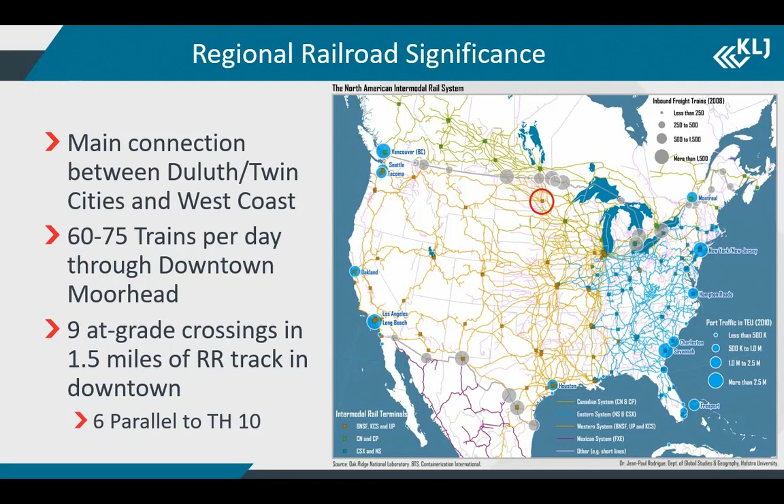So a little bit of background on the BUILD discretionary grant application process. The US DOT puts out this application process to try to find projects that have a significant impact on a local or regional location. They're usually in the 15 to 20 million range. You're trying to get those big projects where a city or a county couldn't pull together funds to fund this on their own.

There's a total of about 900 million available for these BUILD grants, about 25 million per project or less. That's kind of the upper bound, and then only 90 million can be awarded to single states. So they do try and spread this around the country. The last couple of years, they've been making a big push to get about 50% to rural areas for rural projects, which means under 200,000 population. The Fargo-Moorhead area is at 233, so unfortunately, we didn't meet that category to get into a rural application.

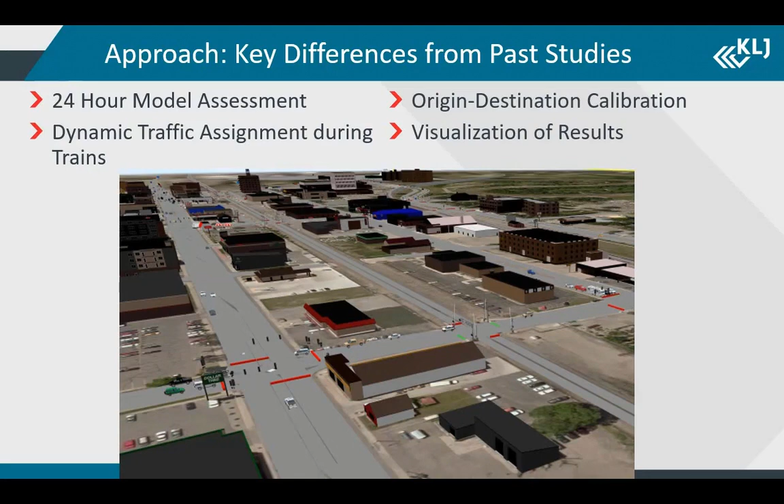So we had some of our graphic designers put together a 3D model of all the buildings in Moorhead, which we were able to take to stakeholder meetings and really show these different options of the project.

So our study approach, we had a very robust data collection. We did the origin destination assessment using StreetLight data. We developed a VISSIM model and calibrated it. Traffic projections development took some time.

With the Moorhead downtown area, it's pretty well built out right now. It's an older downtown, so there is some redevelopment happening, but we're not seeing major growth. However, we have seen major train growth, especially back during the Bakken oil boom. There were probably close to 120 trains going through Moorhead at that point.

We also wanted to look at some alternative analysis when we did put in the grade separation. Could we do some road diets to some of the 5-lane sections going through Moorhead? And then finally, we developed a benefit cost analysis for the BUILD grant.

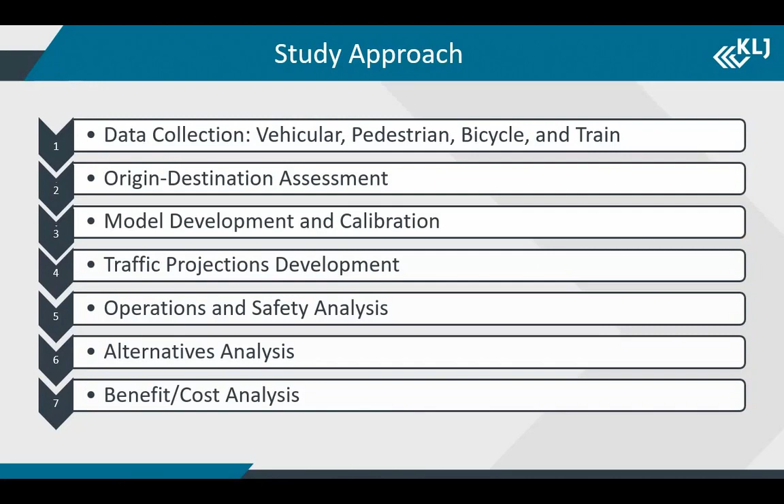So our data collection did include about 20 turning movement counts. We had 8 daily counts kind of around the downtown area. You can see the 3 major east-west routes. And then we did take train data collection points as well, looking at the time of blockage, how many trains, when they came during the day, so that we could put this level of detail into our VISSIM models.

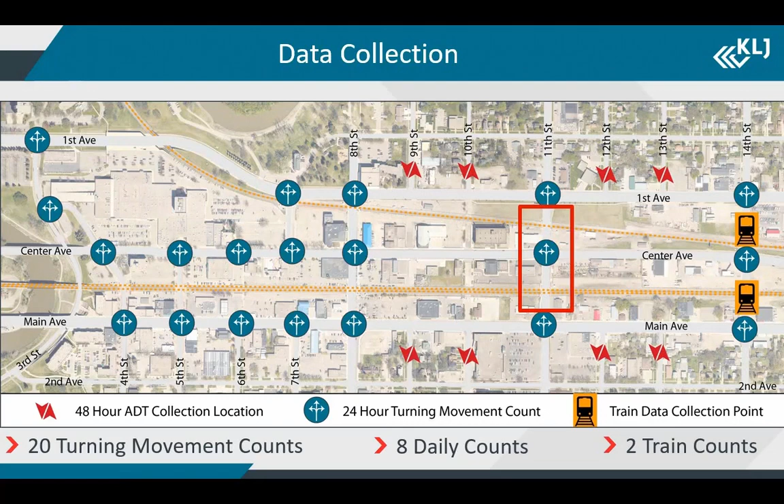So looking at some of that train data over the years, since Moorhead had developed BUILD grants, I believe 3 previous times, they have a lot of this train data year after year of how bad the problem is in Moorhead. And really we saw between 60 to 70 trains per day on average, looking at this yearly data. There are 2 tracks, the KO, which is the northernmost track, and then the Prosper, which is the southernmost track. And they are kind of unbalanced as far as train volumes using them.

Sometimes the trains came when the other one was going, so you kind of double down on some of those queues. The worst case scenario is a 5-minute train one way, with one coming the other way directly after it, which would cause major queues on Trunk Highway.

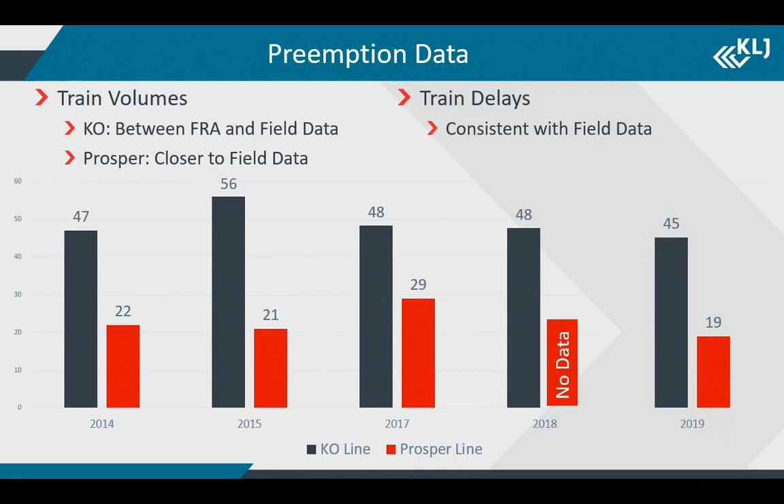What are the speeds of the train going through? Is it fast or slower? Since it's going through a downtown area, I believe it's around 15 to 20 miles an hour for the trains going through. So it's about a 5 to 7 minute train going through here. And they're long trains too, I believe. We had about a mile in the model. So big trains and very slow.

When we looked at how long that train was crossing, our average was between 3 to 5 minutes for blocking a specific crossing. When you add in the gate time, the arm coming down, it was usually 5 to 7 minutes. The previous model was a little bit higher, and then they do have some switching maneuvers where the trains end up blocking a certain crossing for up to, I believe, 10 minutes. So those happen maybe 3 to 5 times a day, usually outside of those peak hours.

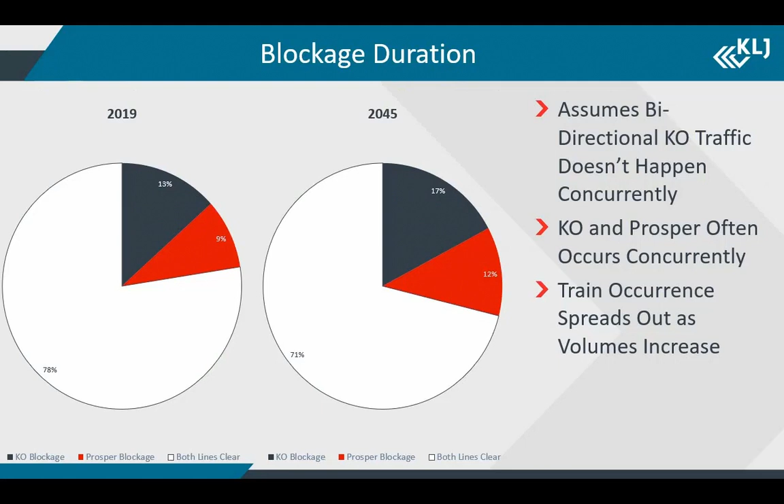So I talked about StreetLight data, being able to take that turning movement data and really assign where that traffic's going. We didn't want to use static turning movements in our VISSIM model, so we wanted to create that origin destination matrix around our study area. So we were able to use StreetLight data with MnDOT's access to it. So we had real robust OD data.

We ended up doing exterior points, both origins and destinations, and then interior zones to balance out traffic where it was going in downtown. This created about a 50 by 50 origin destination matrix for a 24-hour model. That was a lot of balancing. So we kind of grouped this data.

Streetlight already groups it into kind of an early AM, AM peak, midday, PM peak, and then late PM. We kind of took that and said those origin destination routes are going to be pretty similar during those periods, and instead we're going to take those percentages and then balance out the turning movements throughout those sections. So really we only created the 5 50 by 50 origin destination matrices.

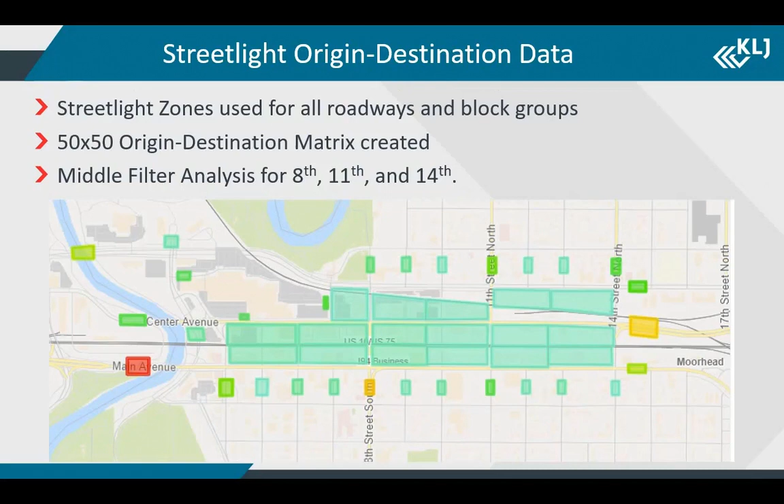And then we also looked at middle filter analysis for the 3 north-south routes connecting all 3 of our east-west routes, 8th Street, 11th Street, and 14th Street. We wanted to really see what traffic was using those, where they were going, and understanding that so that when we did have that 11th Street grade separation, we understood what volumes were shifting from the other routes to use that grade separation.

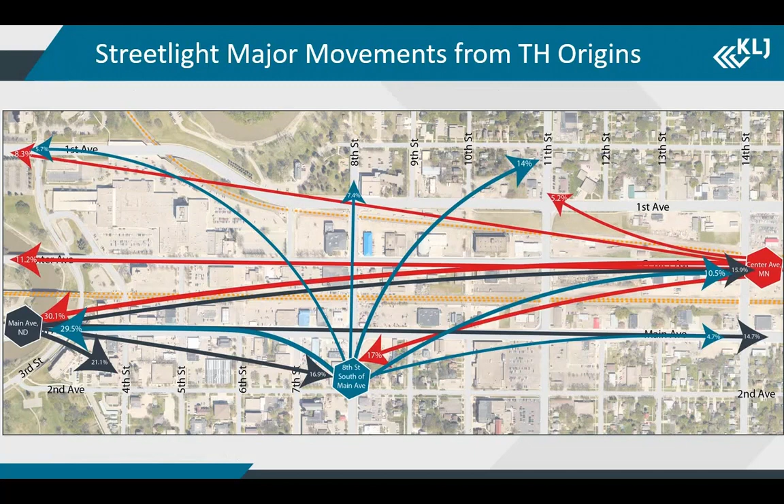And so talking about the matrix, this is a screenshot of one of those 5 peaks. We ended up having all of the origins and destinations summed up. We did a sum of squares in Excel to try and limit that error, comparing back the vehicle inputs of all of the incoming traffic and outgoing traffic that we had from our turning movements, and then balance that through our origin destination from Streetlight to kind of limit out the error.

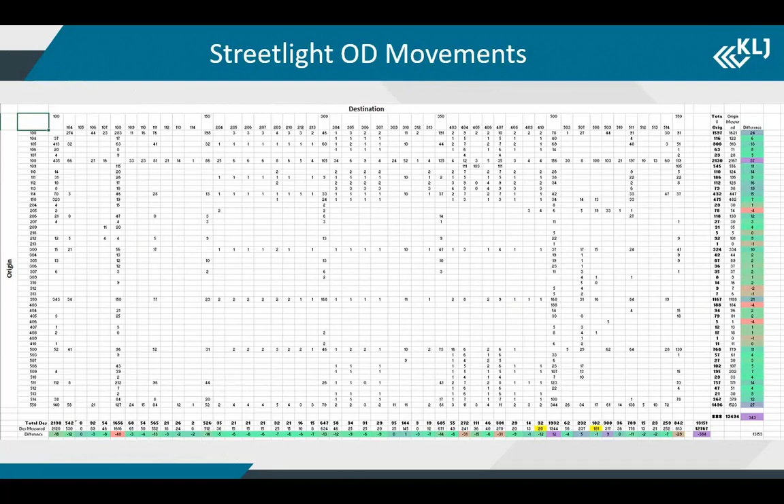And for most locations, we were within probably 300 to 500 vehicles for a five-hour period. So when we balance that back to the turning movements, our movements were off by about 5 to 10 at the most. So we felt that we had a really good balanced set of data going into VISSIM that we could use, and then we did back check this against those turning movements by using some features in VISSIM. So we started out with our turning movement counts.

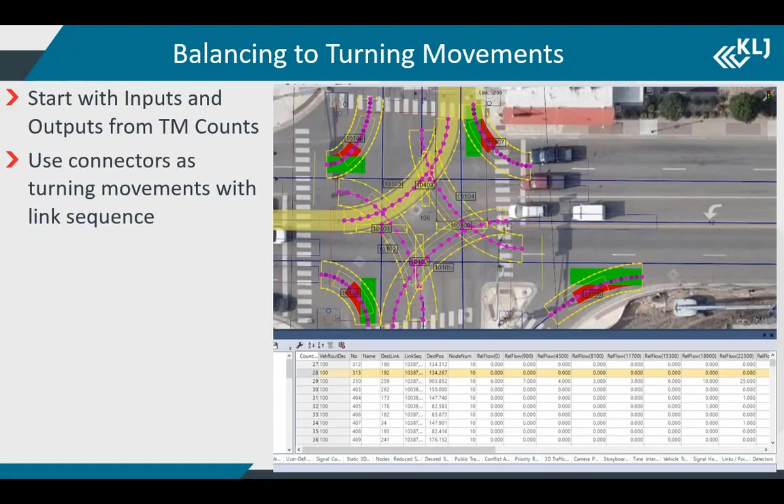We had our northbound, southbound, eastbound, westbound movements for each intersection, for each hour of the day, so 24 hours worth of it. We then took that, and in the VISSIM model, we created connectors for each of those turning movements. So usually you only have your left turn connectors and your right turn connectors. We actually broke the links going through the intersections, so those through movements also had a connector number associated with them. And when we look back, for each of those turning movements, we had a connector number associated with that.

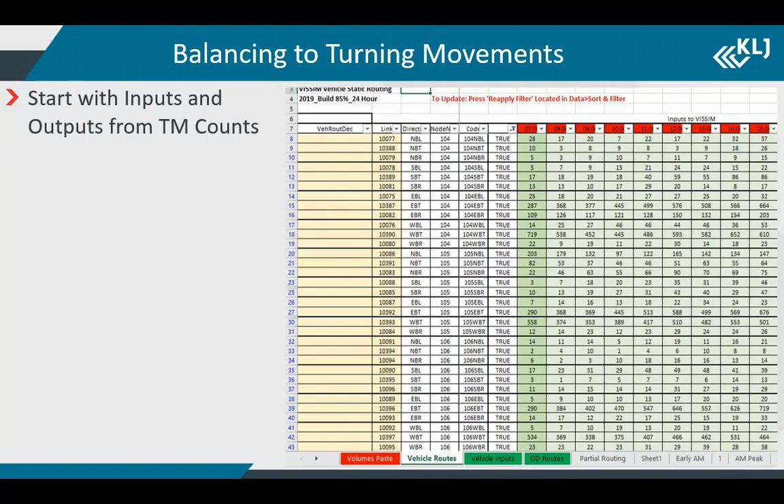So what we were able to do with that then is when we pulled out the routing out of VISSIM, now we had a link sequence for each of those OD routes going through the model. And we were able to do index functions and VLOOKUPs to take our Streetlight data that we had for each hour and then compare that back to the turning movements and then take specific link sequences and change them up to balance out the turning movements. So that was kind of a trick that we learned in VISSIM, was really using those connector numbers to back check to our turning movements.

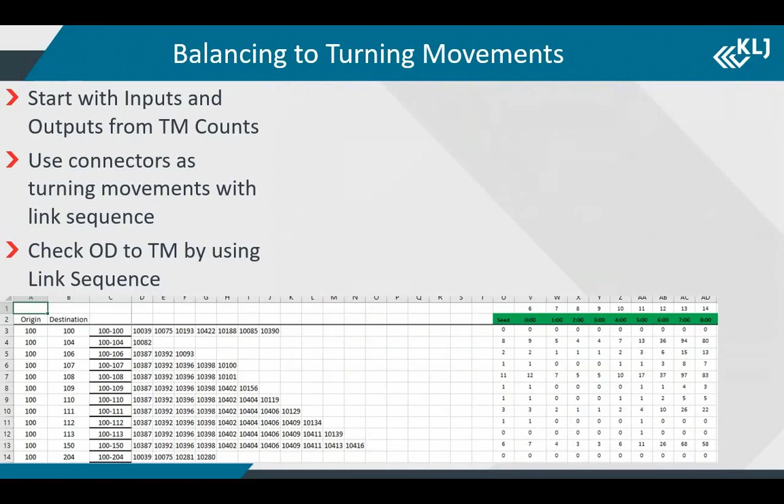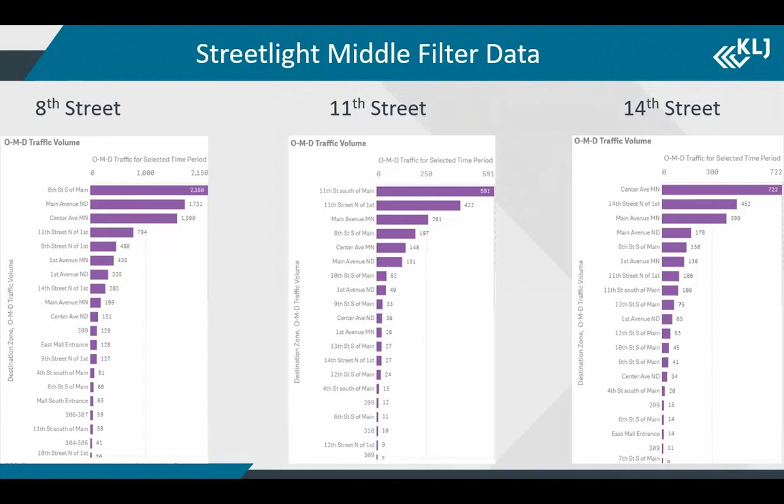Talked a little bit about the growth implications before. We ended up assuming about a 0.5% growth factor for this area. Since downtown was kind of redeveloping, this was kind of a punt for really doing an in-depth forecasting, but we wanted to feel that we had some growth involved in downtown and that we felt comfortable with if we built this grade separation, traffic would still flow through downtown.

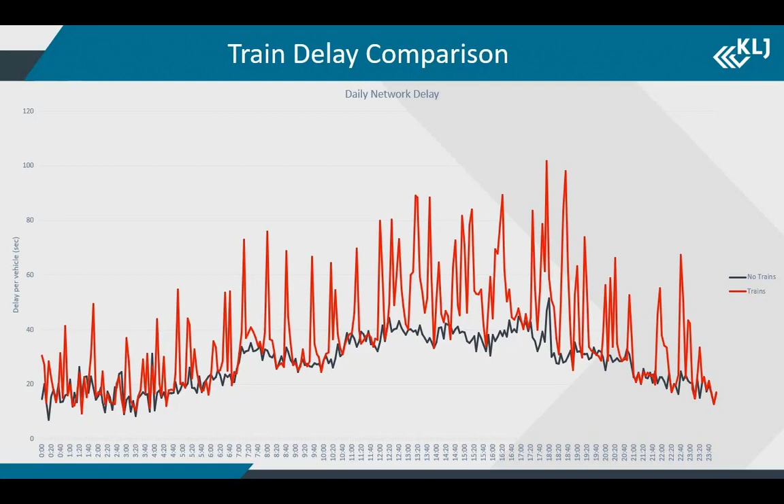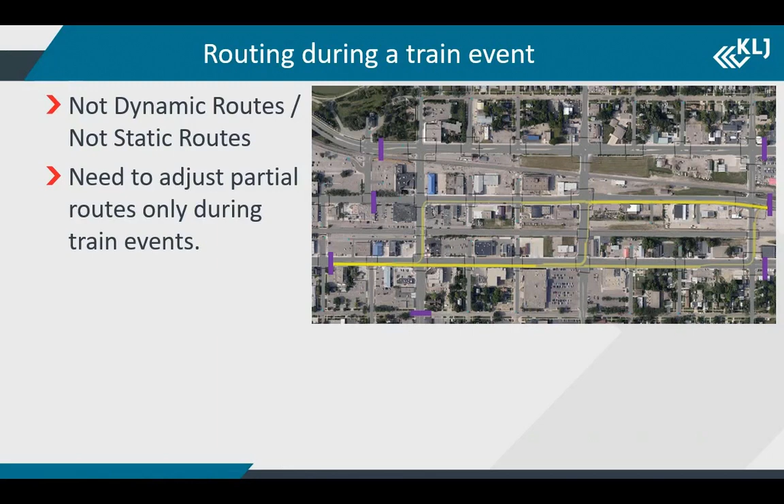I talked a little bit about the routing before. During a train event, we wanted to have this be kind of an ITS feature where we could put up advance warning. When a train hit a detector, drivers would know to use the 11th Street grade separation instead of any of the other at-grade choices at 8th or 14th. And so we wanted to adjust these routes only during train events so that when there weren't train events, people still took their more direct route.

And so we get to call out Levi here. We kind of ran into a problem where I knew I was going to have to do some coding. It ended up being a lot easier than I thought with the route choice method option in the partial vehicle routes. And so Levi helped us with developing a formula where when a train came into the study area, tripped a detector coming into the area, the routing would change dynamically where drivers would know to use the grade separation. And so instead of guessing at what that traffic shift would be to the grade separation, we were actually able to dynamically see what that volume shift was between our no-build and build model by using this dynamic routing during a train event.

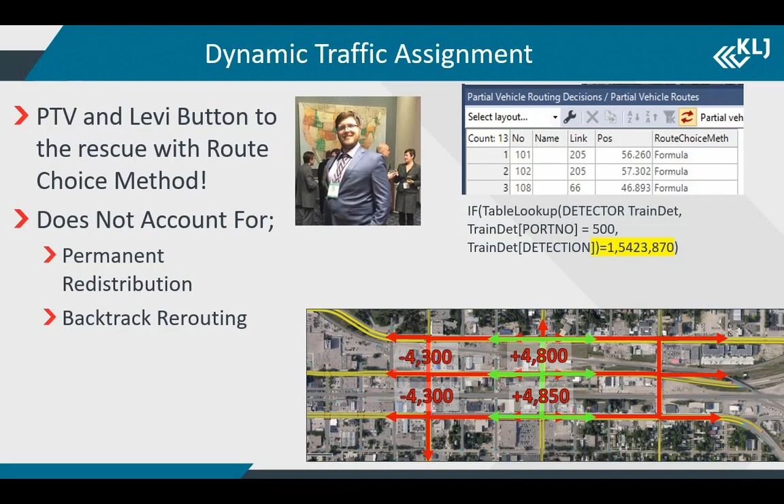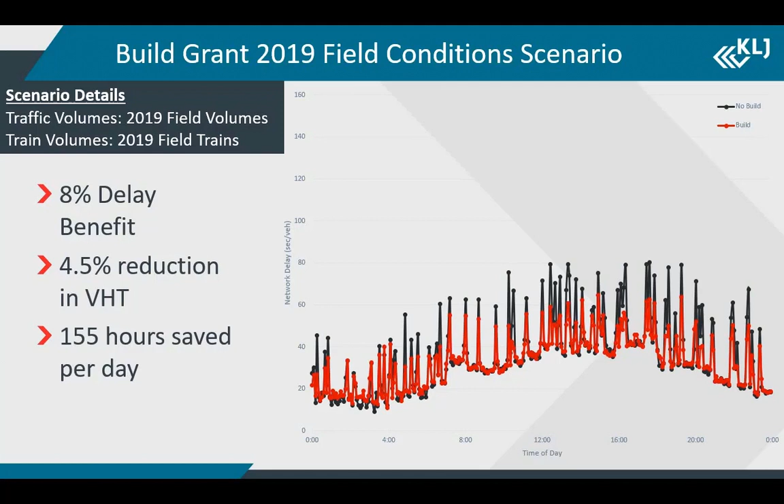So when we started looking at our build grant results for putting in this grade separation, we did notice quite a bit of this delay getting cut by about a third or half of those spikes. And so for our 2019 field conditions, where it was our balanced volumes, our existing train data from 2019 and our existing volumes, we had about an 8% delay benefit throughout the day, and then about a 4.5 reduction in total vehicle hours traveled. This was about 155 hours saved per day of just people not waiting at tracks and queues.

When we started looking at 2045 scenarios, you can see that big increase in that PM midday peak where it's not fully recovering after a train event. A train would go through, you'd still have some of those queues, and then you'd have another train go through and you wouldn't get rid of those queues and they just compound and really start adding to the delay throughout the day. So we had an even better delay benefit, about an 18% delay benefit for our 2045 forecasts. That was about a 1% growth for traffic volumes and a 1% growth for train volumes.

We did a couple other scenarios where we looked at that 0.5% growth for traffic volumes. We looked at a 2% growth for train volumes. And when we went up to about a 2% growth for train volumes, it absolutely broke the model because you'd get to the PM peak and these would just compound to where they couldn't recover at all and would end up causing gridlock in our models. So we really went to our stakeholders and said that there is a limitation to the model. It might work, but really with a 2% growth rate for the trains, we would expect some pretty bad conditions in the future, which our model just can't look at.

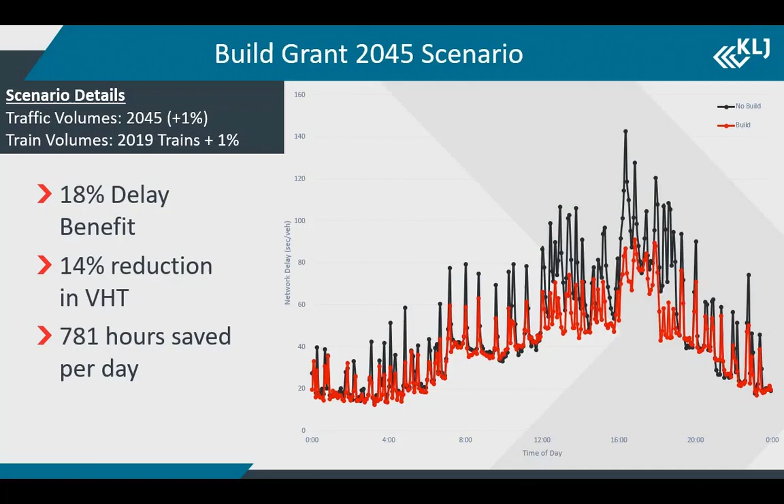So I did talk about that 0.5% growth. So we did some additional model runs after the build grant was submitted with additional trains. We wanted to look at that high mark for trains that had come through. And you can see that the lines get a lot closer together. We used a little bit less for traffic, but we still had a much bigger existing benefit.

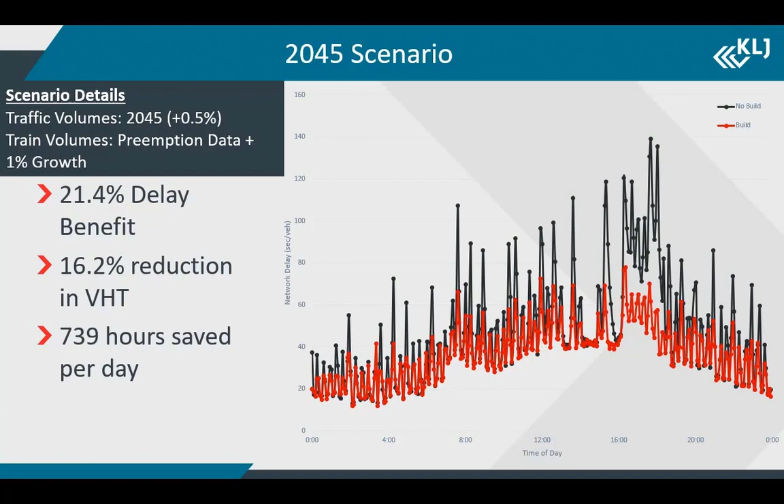So more trains cause more delay. If you give them a grade separation, it's going to be a lot more benefit when we were looking at that. And so we were at about 266 hours saved. And then for that 2045 scenario with just the 0.5% growth, we were in that 700 hours saved per day range. And so when we compared what we had submitted for the build grant and what we had for our sensitivity scenarios, there weren't too many differences other than that existing when you looked at your total VHT saved.

And we had a little bit more benefit, and if we were to go back and submit for the build grant, we probably would have used this because there's a lot more benefit attributed to existing conditions than to future conditions.

And so just a video of our build conditions. You'll see as the train comes into the model here that this left turn queue is going to stop queuing, and all of these vehicles are going to go up to 11th Street now. And so we had some dynamic or adaptive signal timing where our maxes jumped up by about 50% for these major movements, having that additional traffic growth coming in.

And you'll see that there's hardly any queuing along Main Avenue down here. There's still a little bit of queuing on US 75 and to the north, but these left turn movements, these through movements, clear within one cycle. So it's a lot better running model. You're not seeing those really long compounding queues that we were seeing in the no build.

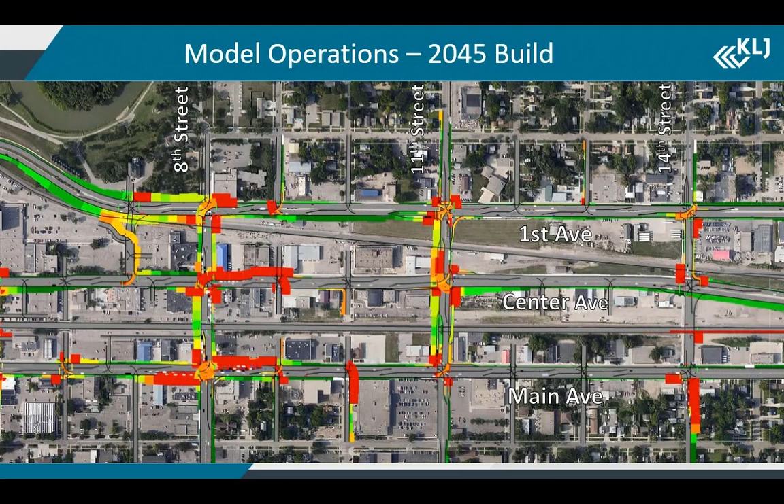Another big factor for our build grant application was quantifying the safety. It wouldn't be a presentation by me if I didn't talk about SSAM a little bit. So we did use SSAM to really quantify the rear end, merge and crossing conflicts on a quantitative level between no build and build. From the pictures, you don't see a lot of change. There's a lot less impact along this left edge where those queues were extending across into Fargo. The build scenario really did fix some of those queuing issues.

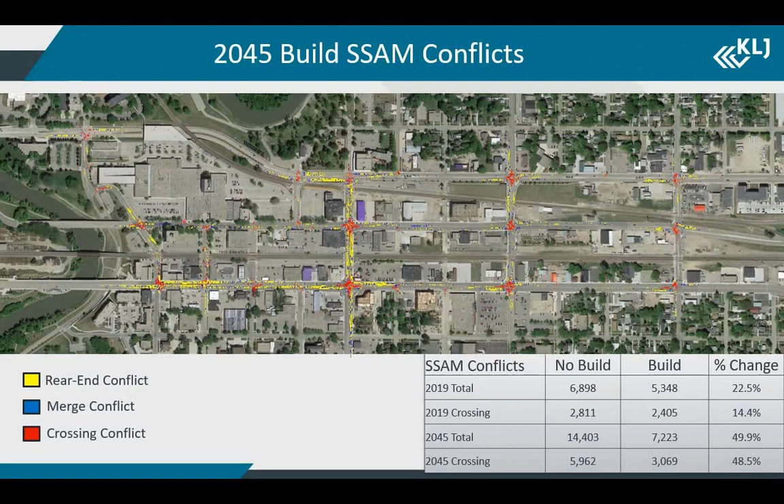And so we ended up with a 2019 change in conflicts of about 15 to 20%. Crossing conflicts are usually your more dangerous ones, your left turning conflicts, your right turning conflicts. So we did end up using both the crossing conflict percent reduction and the total reduction in our BCA calculations. For the 2045 models, just based on that compound queuing, we saw a real big reduction in our total conflicts, which ended up creating a pretty big safety benefit.

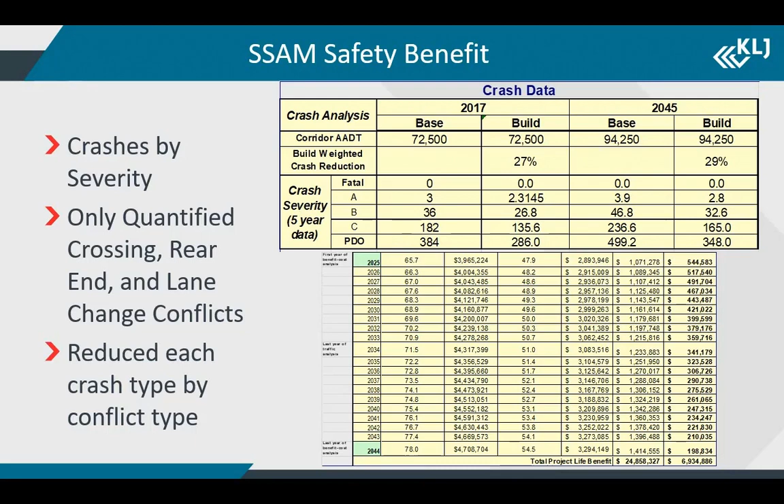So when we start looking at bringing this safety benefit into our build grant BCA application, we did separate it out by safety, and then we looked at the existing crash data for the last 5 years and really broke up those crashes by rear ends, crossings, and lane change type conflicts, so that we could really target those percent reductions in our conflicts and attribute them to only those types of crashes. And then we quantified them based on the 20 years in our safety benefit, and ended up with a total benefit of around 24 million for that 20-year benefit.

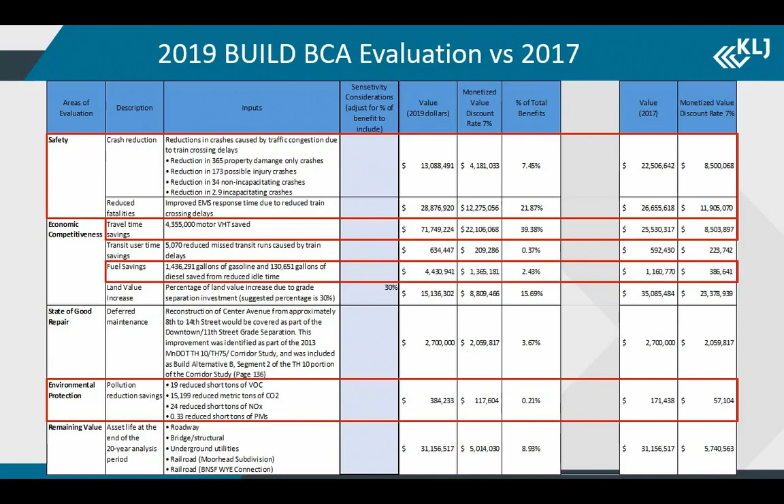And so for our final BCA, something a lot different than the way I had done MnDOT BCAs is the 7% discount rate. So what that really does is you have to see benefit in your existing conditions, because that 7% compounds over 20 years. So whatever your benefit is 20 years down the road, it's a lot less using a 7% discount rate, where MnDOT uses about a 2% discount rate. So that was where our future models didn't have as much benefit as our existing models did. And if we had to redo it again, we'd look at some of those different scenarios for quantifying our existing benefit.

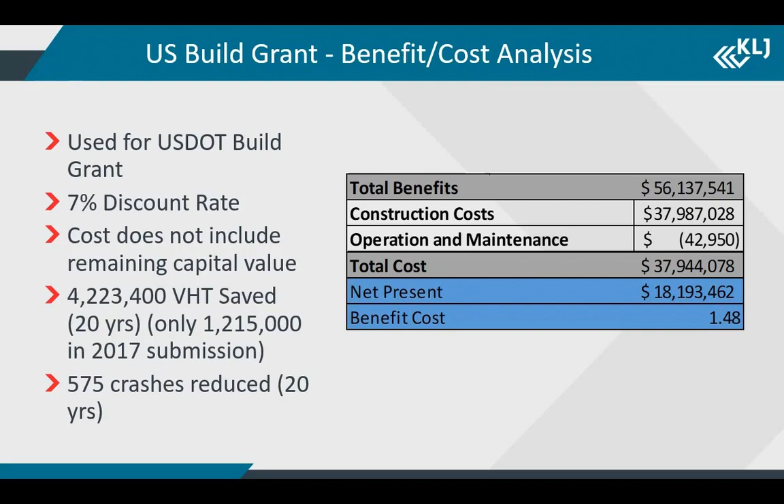For some totals over that 20-year horizon, over 4 million vehicle hours traveled would be saved with this grade separation project, and about 575 crashes would be reduced just by eliminating that congestion in the downtown area.

We did look at several build alternatives. Because our model was operating so well during those build operations, we looked to downsize, going from 5-lane to 3-lane for some major routes. We again used our VISSIM model for this, since we had kind of the entire downtown area. We were able to test these very easily.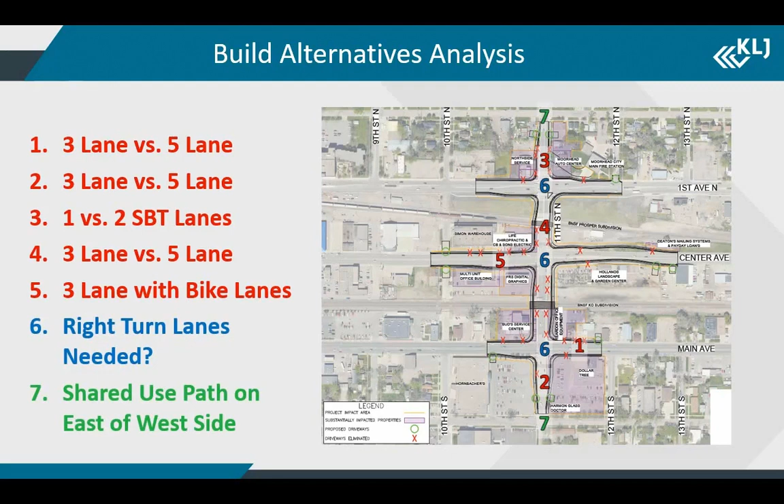We also looked at removing a few right turns, and then if we had space, to use a shared use path instead of one of the lanes on 11th going in under the bridge, so that we had a multimodal connection that was also grade separated. Looking through these, I'm going to go through fast because I know I'm running out of time. We did go through these separately, recommending if they worked or not.

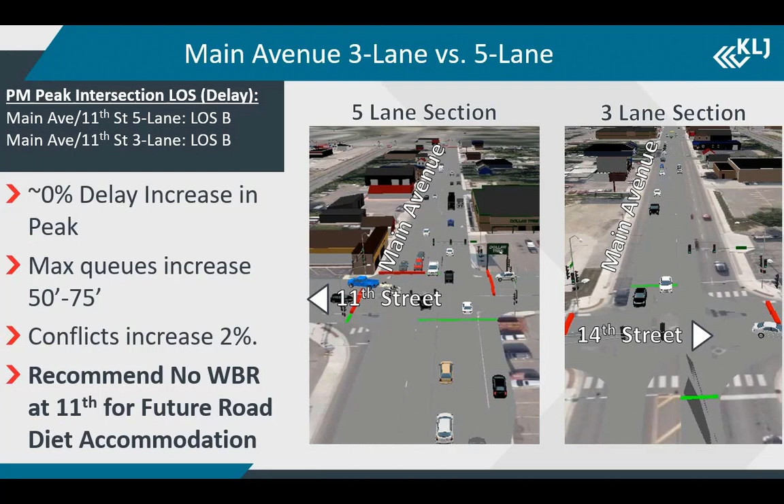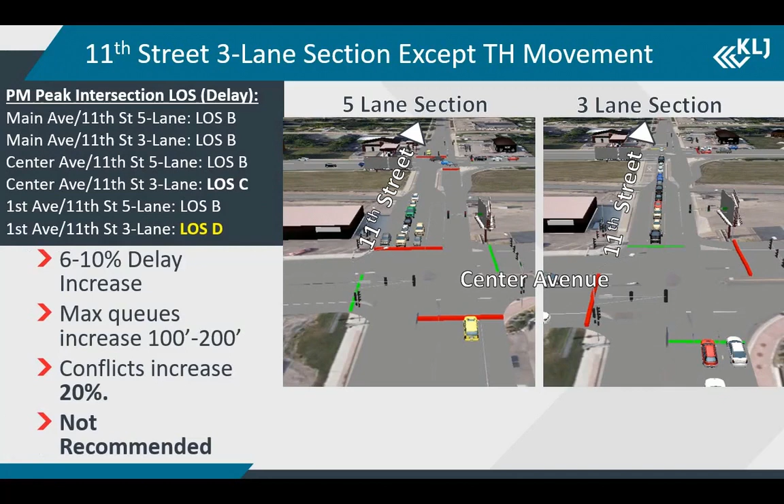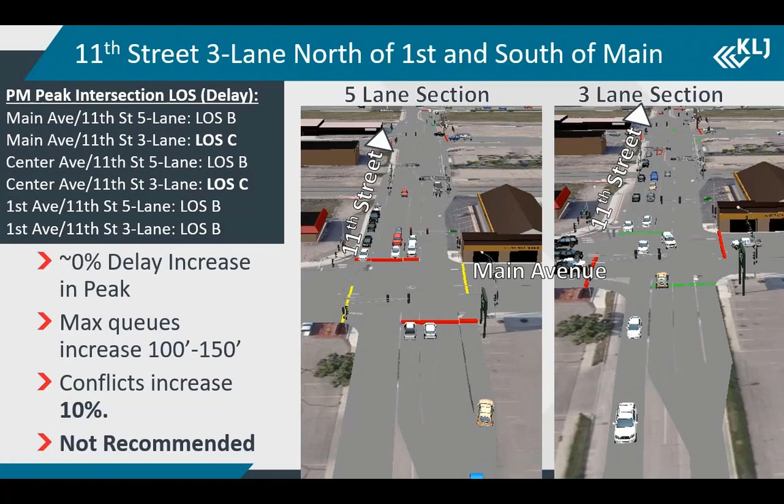So Main Avenue, to the east of the study area, we showed that that was able to be changed from a 5-lane section to a 3-lane section for the road diet. 11th Street wouldn't be recommended reducing to a 3-lane section, because the queuing was impacting adjacent intersections. The 3-lane section along 11th north of 1st and south of Main, so outside the study area, wasn't recommended, just because of the lane usage coming into the intersections.

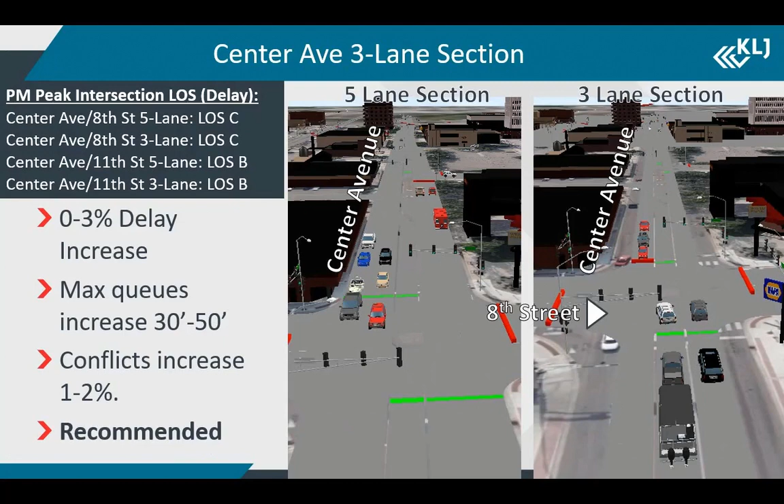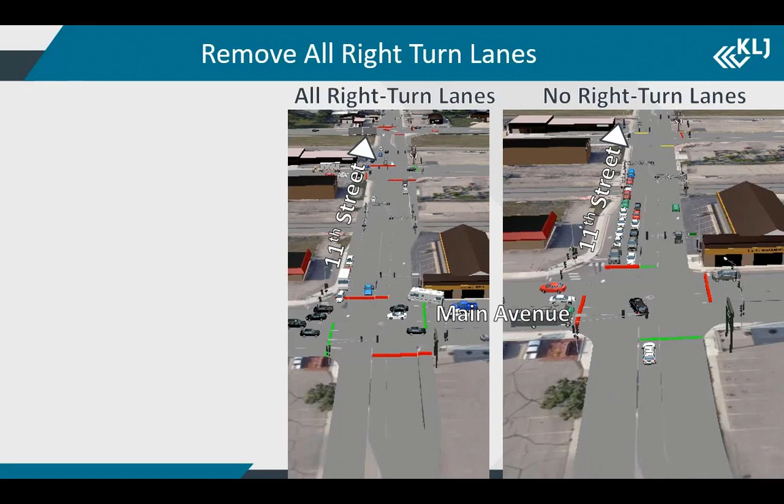Center Avenue had already been identified as a road diet, going to a 3-lane section, and we confirmed that through our analysis. Again, the conflicts weren't a major factor for this either, so we felt that it'd still be a safe 3-lane section. Whereas some of the other locations, when you change it to a 3-lane section, you're adding to the congestion, and going through these intersections, we saw a 10 to 20% increase in conflicts. So that was another reason why we didn't recommend 3-lane sections in a few locations.

We did end up looking at all of the alternatives from that safety perspective, and we were able to highlight which alternatives caused a major increase in those conflicts. And then the delay, which ones created a delay increase versus our base build model down here. We went through a couple of different options for lane usage, getting rid of those right turns. We gave the stakeholders those options so that they could decide on their final vision for this grade separation project.

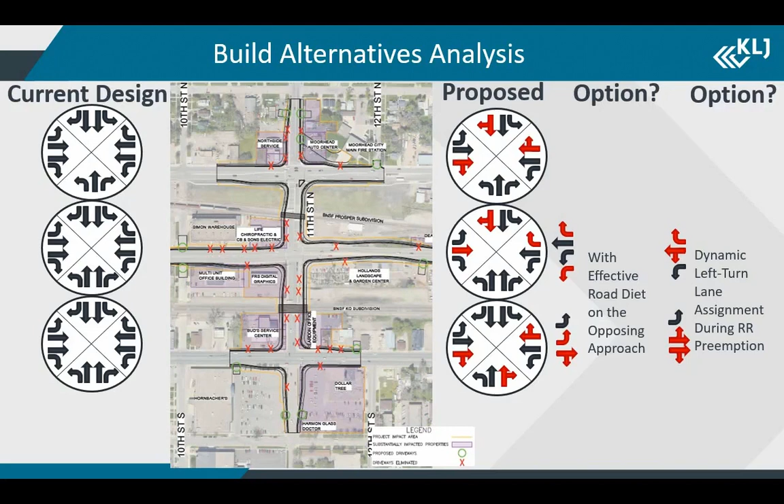And then with that, just a summary: a larger area equals a larger benefit. Anytime you have queuing or a project going through a downtown area, you really want to quantify all the traffic coming in and using that downtown area. The visualizations were very key in talking through those alternatives with the stakeholders. They could see the queuing that could happen.

Really, if they wanted to trade in that 5-lane section for moving vehicles to the 3 lanes for more sidewalk space, the ability to put in multi-use trails, was really key in ironing out that final vision for the project. Being able to have that static and dynamic routing combination without using scripting was very key. So having that option to use those partial routes to route traffic inside an origin destination matrix.

And then finally, SSAM providing a site-specific safety benefit versus using CMF factors is really a detailed way to understand what types of crashes your improvements are reducing, and gives you a better feeling for the safety of the project as well. So with that, I guess we're open to questions.

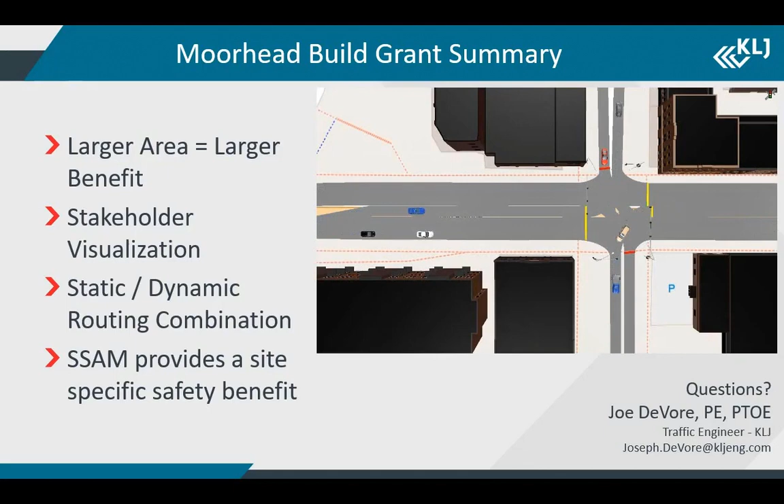Just being able to show them the project, having that existing traffic, seeing those queues when the trains go through, and then being able to slide it over and really see that benefit between the 2 videos I showed in real time would be a major push for this project. People already know it's a bad area out there. They don't want to drive through downtown when there's trains going through. But just being able to visualize that in front of them would be a huge benefit.

Good to hear. Second question, I don't notice too many heavy vehicles in the model, but as far as the more specialized vehicles like a school bus, a transit,